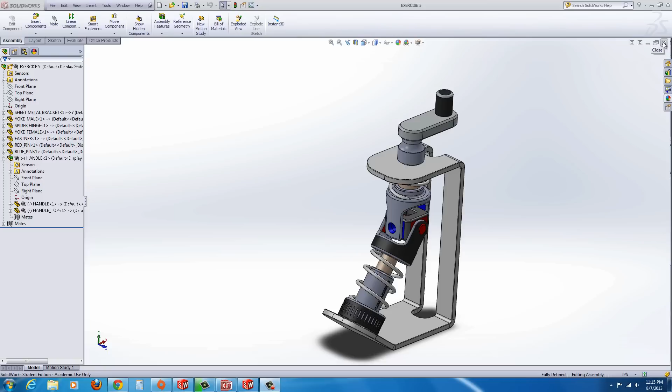So let's begin. I'm going to start with a new assembly file. Click on assembly, hit OK. And over on the left here, we get to begin the assembly. Just go to browse. And it should be directing you, or hopefully you're directing yourself, to the exercise 5 files.

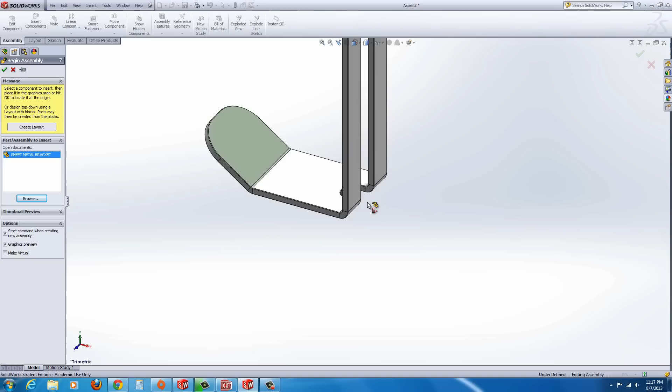Now, rather than just dropping it anywhere, sometimes you get lucky and your pointer lands on the origin, which is invisible right now on my screen. That's what we actually want to do with this particular part, is get it on the origin. If you can't see it, the easiest thing is just hit the green check mark, and it will automatically drop into the origin. This little F in parentheses that you see here, where it says sheet metal bracket, indicates that it's fixed. We do want the very first part in this case fixed. That means it will not move whatsoever.

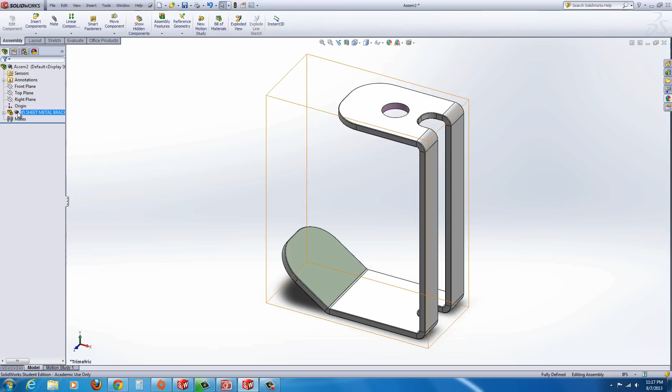What's going to happen with the additional parts once we start adding them? Those parts will spin around this part or inside them. And if you don't have anything fixed, all of them will just spin around arbitrarily. So by default, SolidWorks always fixes the very first part. If for some reason you want to change that, you can always right click on it. There's a float option. I don't want you to do that now. We actually want this to be fixed throughout this lesson, but just know that it's there.

Okay, let's begin. Under Insert Components here, if you hit the little arrow, you'll see that there's Insert Components, New Part, New Assembly, Copy with Mates. The New Part, New Assembly, that's what we call top-down assembly modeling. We could construct geometry using a skeleton of sketches or whatnot and generate the parts inside of the assembly based off of other parts and geometry. Therefore, they update together. Bottom-up is a much easier method for a new user. Actually, the top-down method is where all the power is at, but we cover that later in exercises 9, 10, and 11. But we're just going to start with bottom-up.

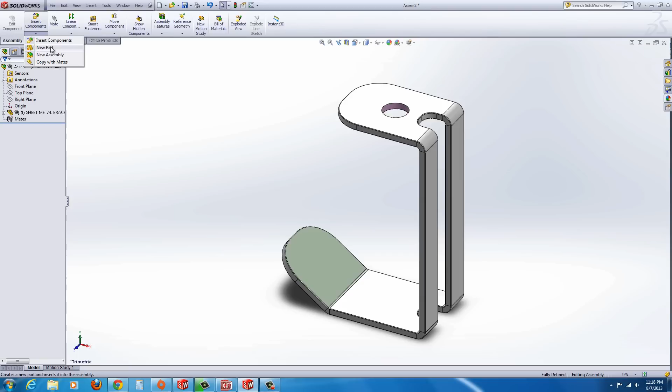So we're going to go to Insert Components, go to Browse, and we're going to locate the next part, which is the yoke male. Hit Open. Just click to drop your part somewhere around here. If you want, you could actually go to an isometric view. Like here, I've set to trimetric actually. You can go to isometric. Either one is fine.

Okay, we're going to begin by mating these parts. You could go to the paperclip tool here, and now you select that salmon colored surface there, the pink, and then the pink surface here. Be careful, SolidWorks will let you select edges. Edges are very useful for mates, but we're going to avoid using them in this exercise. Later on, they will be covered. But in this case, we just want to stick with faces.

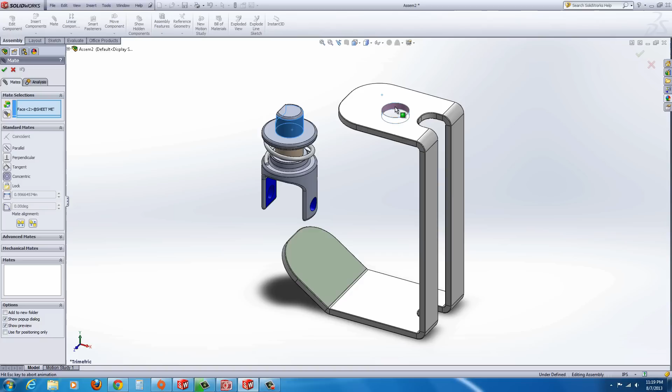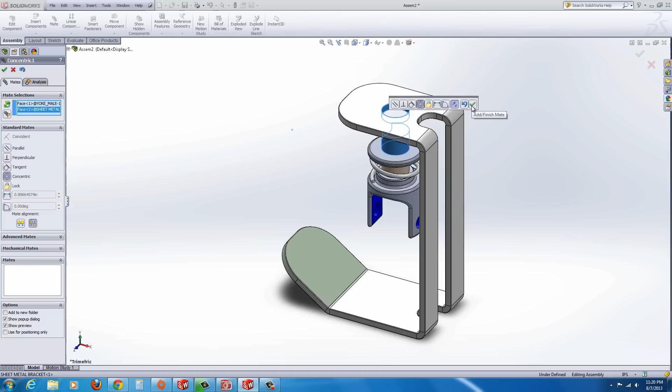And once those two are selected, you'll see the part moves into position, and it's actually aligned concentric. Now, this right here indicates that that little button is concentric. There's other options like tangent, perpendicular, parallel, at a distance, or lock. We don't want any of those except concentric. SolidWorks was smart enough to know that that's the most logical answer here. Let's hit the green check mark. In fact, let's hit the green check mark over here. Now what we can see, if we grab this part, we can actually move it.

You click on it, drag it. Essentially what we've done is we've removed some of the degrees of freedom. All it could do now is move up and down and rotate. It can no longer move in the X and Z directions.

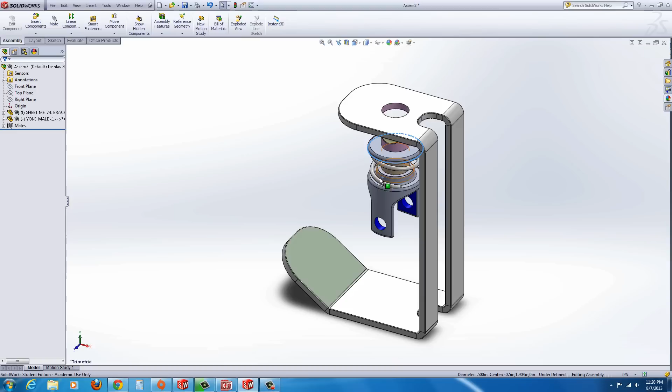So from there, let's just drag it down a little bit. And we're going to continue to add some additional mates. By the way, there is the Move Component tool. That's a nice tool. That should do exactly what we did earlier, where we just grabbed it and gripped it. But inside here, there's also free drag, along assembly, delta XYZ. We'll go through that in just a little bit. There's also collision detection, physical dynamics as well. But we'll cover that shortly.

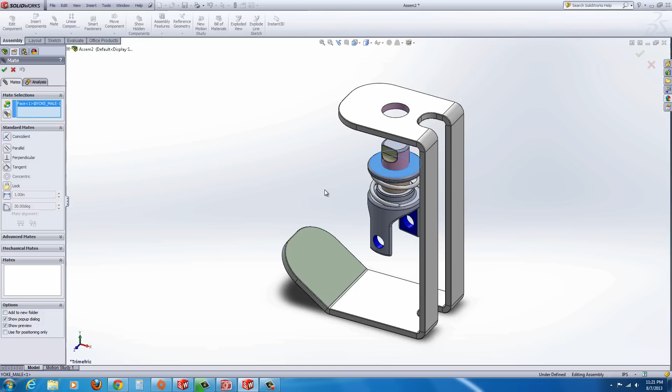But let's right now just go to Mate and see this light gray surface at the top here. Click on that. Now with your middle mouse button depressed or your scroll, you can push that down and move your pointer up. It should expose this underside surface of the flange. Click on that because we want our faces to go coincident. And again, SolidWorks makes the right choice for us, coincident being that choice. Go ahead and hit the green check mark to apply.

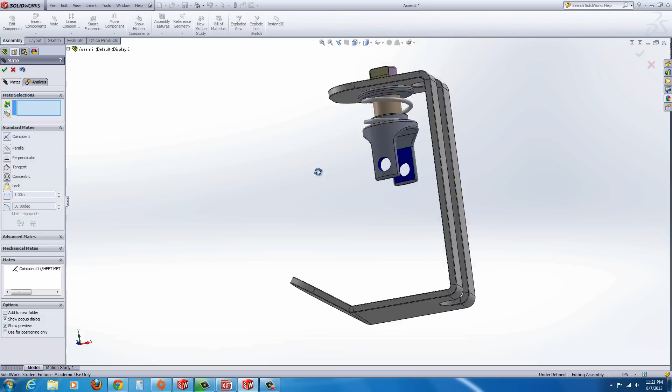Let's hit the green check mark over here in the upper left, and now we could go to Move Component and click on this top surface and drag it around. Now, we didn't have to go to Move Component, we could actually just click on it and drag it around, but just so you familiarize yourself with some of those tools as they're useful. You can see that it's removed the degrees of freedom for the vertical movement up and down.

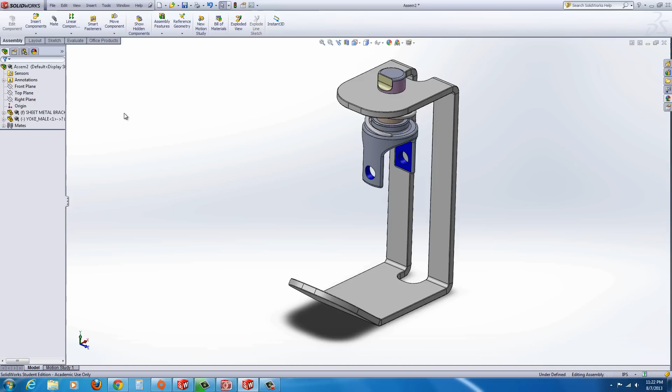Okay, let's introduce another part here. So we're going to Insert Components, Browse, and now we're going to look for the spider hinge. Click on that. Hit Open, and just somewhere around here, click to drop it. Okay, just some of the other techniques or technology that's built into here. If we go to the Move Component, I'd like to share with you some of these things. Right now we're on standard drag. There is rotate, and you can rotate around the center of the object, things like that, but we actually don't want rotate so much as we just want to show you collision detection.

Now with collision detection, you can have it test collisions between all components, which can be demanding if you have a lot of parts on the screen. So sometimes you might want to select the individual components by clicking these components and limit the amount of resources that the computer has to take up to try and calculate those things. We want it to stop at collision, and we'll leave the other, drag part only, alone. But now if we go over here, in fact, actually it's still set to rotate. Let me cancel that. Let's go back to Move Component, Collision Detection. Now drag it.

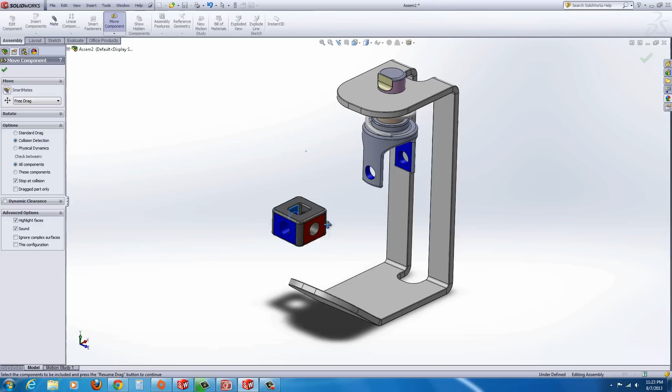And unfortunately, my computer seems to have locked up a little bit here. If we move it there, you can see it moves. Again, let's try collision detection. There we go. It's a little slow on the uptake. Right now I'm processing a video, so there's not a lot of resources on my computer. But anyhow, you can see as it hits, it actually pings, and you hear a little ping noise. As it strikes it, it shows where collisions are taking place.

There's also physical dynamics. Physical dynamics is a little bit different. It's kind of like the domino effect. You could actually push one part with another, or imagine like a pool table. You had a cue ball, and you grab the cue ball and drag it along the table, and whatever balls it hits, it moves them out of the way.

The only thing it doesn't accommodate for are several things, like the inertia or momentum and things like that. So when you push them, they just move out of the way, and that's it. They won't continue to move. There's no factors like gravity or things like that in there. There are packages for kinematics and dynamics where you can do that type of a study, especially in the SolidWorks simulation tools.

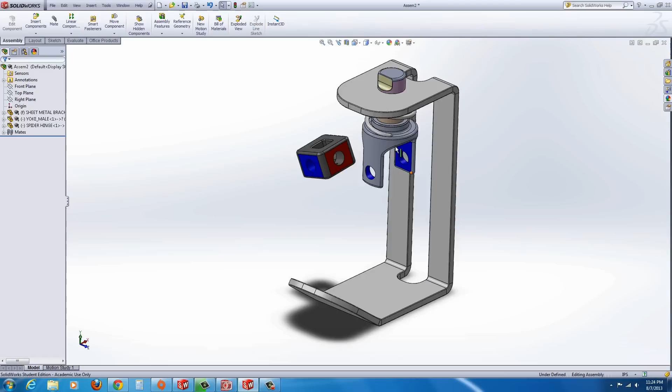Okay, let's move on and turn off physical dynamics. I moved it by accident there, just to show you. If you go to rotate component, you could rotate it around the centroid however you want. But let's get this locked in.

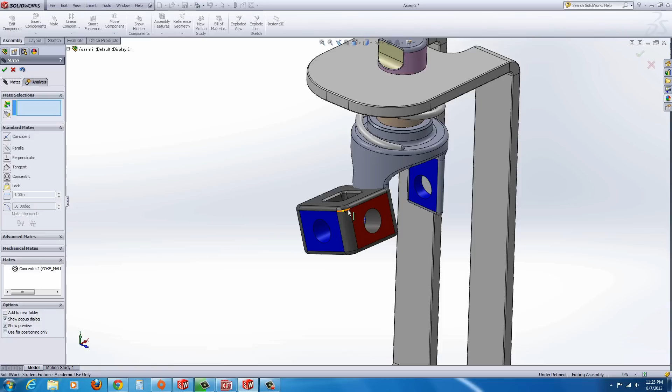We're going to go to the Mate tool, the little paperclip up here. Select this blue hole, the actual cylindrical face of the hole, not the flat, and then select the hole here, the blue hole. It should align itself, so hit the green check mark. Now your part might be over here or back here, but be aware it should be aligned concentric to that hole, and it always positions itself as such. It's almost like there's an imaginary rod sticking between them.

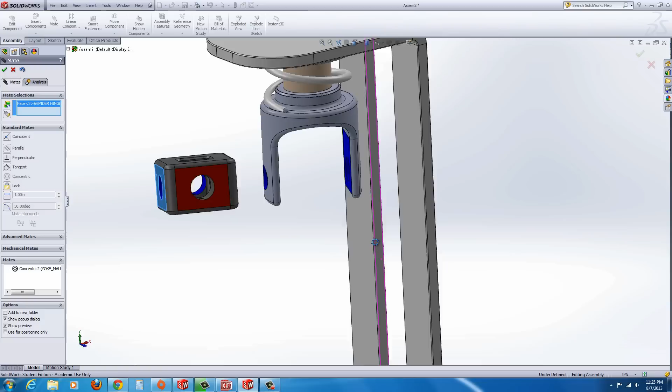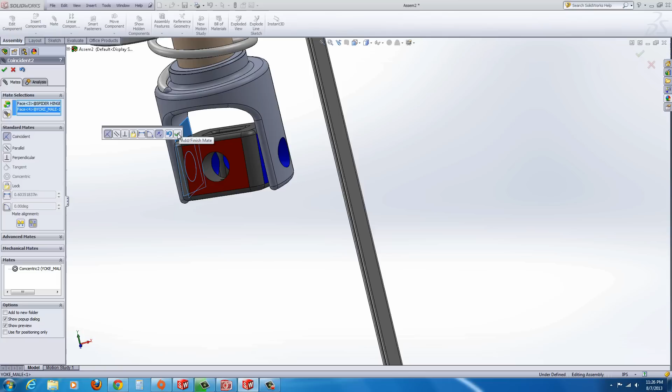Now let's go ahead and select the blue face of the pin, the flat blue face, and then select one of the blue faces on the inside of the yoke. The question is which one? You can select this one, but my recommendation is to select this one on this side so it goes in alignment with it. There's an aligned and anti-aligned option, or sometimes you can flip it, but you can run into little error messages from time to time if it's over constrained or something. So I just like to avoid it altogether. Just hit apply and make sure you get it right the first time. But if it's flipped the other way, try using that aligned versus anti-aligned option.

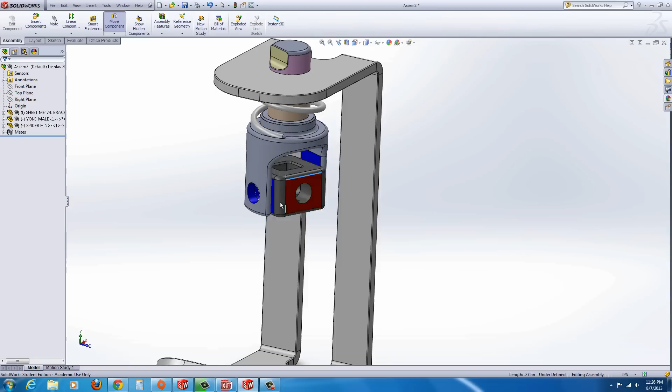Let's hit the green check mark, and you can see that we can now move and pivot this part inside there, and this rotates.

Let's bring in our next part. Go to Insert Component, and actually you do have the ability to use Explorer too. Microsoft Explorer, find the parts, and drag and drop them in. You don't always have to use this method.

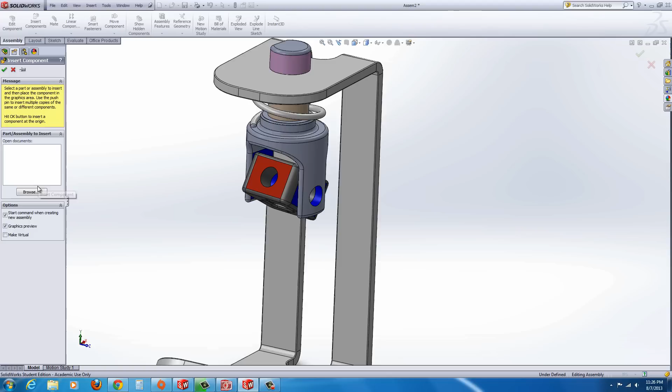Now I'm going to go find the yoke female, open that up, drag it in, and let's start establishing mates.

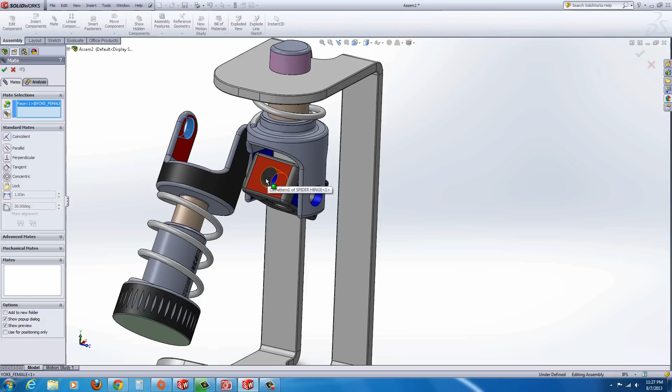Click on the paperclip here. Select the cylindrical hole, the red hole here on the leg of the yoke female, and then select one of the holes near the red face on the spider hinge to align that. Hit the green check mark. It should automatically go concentric.

Now select this red face on the spider and this red face on the inside of the actual yoke. Hit the green check mark to apply.

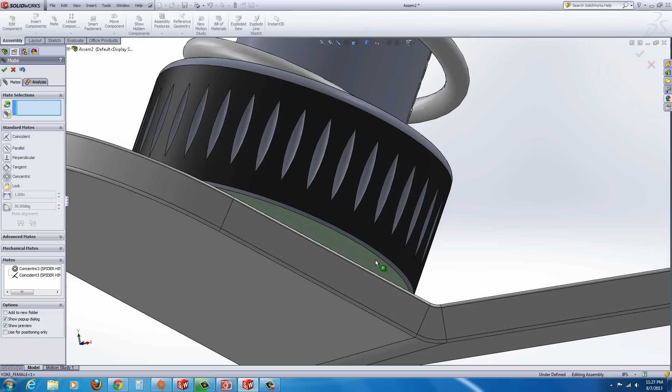Finally, select that little green underside surface there at the bottom of that plunger, and then rotate around until you select the pale green face on the bracket.

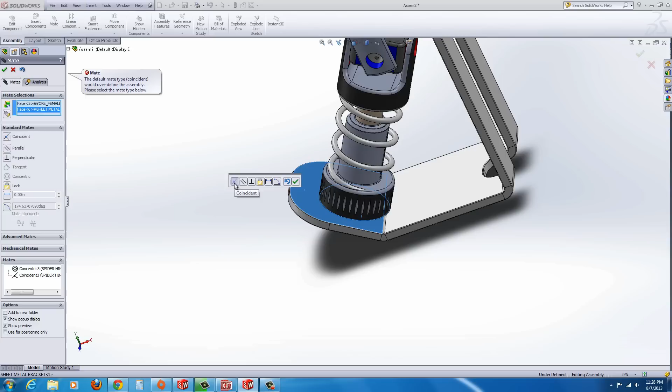Now you might get an overdefined mate type. The reason for this is that SolidWorks wasn't smart enough to select what we really needed. In fact, there's a little distance gap between those faces, so coincident wants to go face-to-face contact. It can't do that because there are other relations constraining up at the top. So this is where you could use parallel, and the parallel should align it.

There it is. Now, if for some reason it doesn't work and you keep adding mates, be very careful not to compound mates. In other words, if it's not working the first time, stop, delete it or undo it, then add your next mate. Over here in the feature tree, you'll see the two little paperclips of mates at the bottom.

If you hit the little plus symbol, you will see all the mates that have been added. If some of these are lit up in red or yellow, that's usually an indication that there's something wrong with them. You could right click on them and you have the ability to edit those features.

Here it will take you back. You could change it from parallel to perpendicular or coincident, whichever one you think you need to do if it is wrong. Sometimes it's easier to just delete it, or delete a whole series of them if you've compounded them by accident. You just click on it, hit the delete key on your keyboard, and they'll disappear.

Anyhow, that's one thing. You can also right click at the top of the assembly, and there's actually tree display, and you have the ability to show the mates that are dependent, view mates and dependencies. What that does is when you hit the little plus symbol next to each part, not only does it show some features here, but it also shows the mates that were established with that individual part.

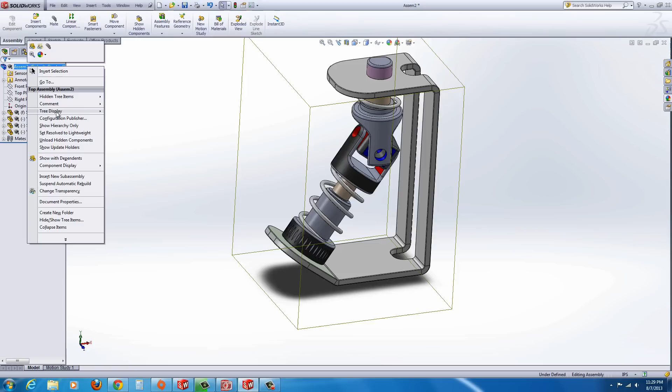I like that sometimes, but other times it's a little too much information. I sometimes just like it all categorized in the mates folder at the bottom. So let's go back to view features, and when we go back there you'll just see the features for each individual part.

It's whatever you prefer. Let's go ahead and go back to Insert Components, go to Browse, and find the red pin. Open that up, drag it over here, and we want that to go into the red hole.

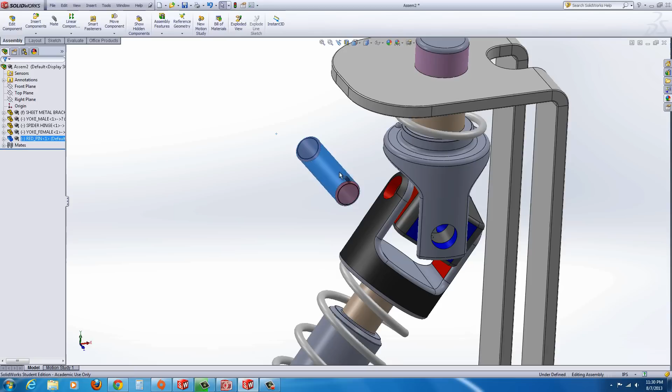So go to the Mate tool, or let me show you another trick. You could hold Alt on your keyboard, grab the surface you want to mate with your left mouse button, and drag it to the surface you want to mate it to, and it should go automatically in. In this case, you can see the little symbol of concentric next to the pointer. Release the mouse button first, then release the Alt key, verify it's concentric, and hit the green check.

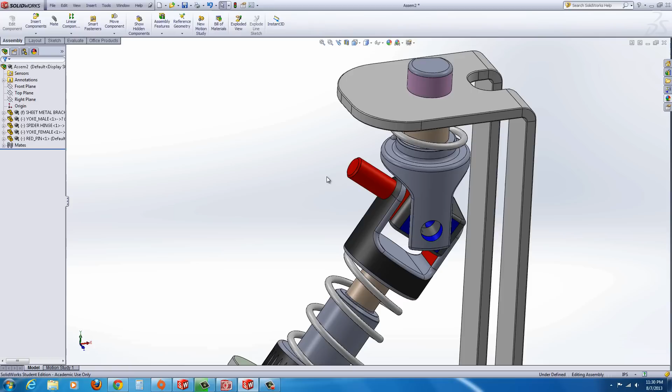This next one, the tangent mate, doesn't always work very well that way, so I just like to add it in manually with the Mate tool. Select this end face of the pin and this dark gray cylinder face, and it should go tangent by default. Hit the green check mark.

Let's go to Insert Components again, go to Browse, and find the blue pin. Now you're going to need two of these blue pins. Let's just drop one in over here first, and then I'll show you how to add a copy.

Hit Escape a couple times to make sure you don't have anything pre-selected. Hold Control and grab the blue pin with the left mouse button. Holding Control, you could drag off a copy. In fact, you could even mate this one if you wanted to, but I'm going to drag it over here on the far left side and release it. Now I have two pins.

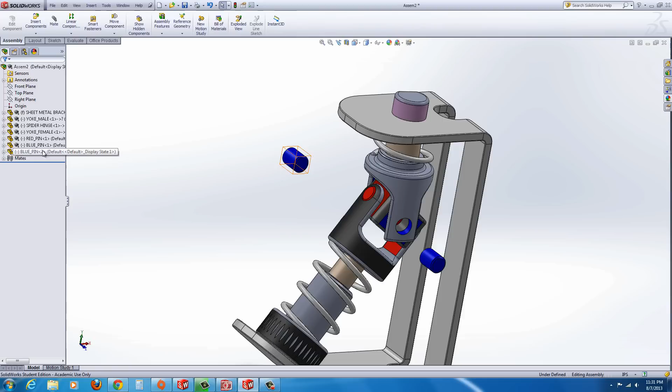So that's one way. You can also grab them from the feature tree and, holding Control, drag them in as well. But let's go ahead and mate these.

Go to the paper clip tool. Select the cylindrical face of the blue pin and the blue hole. Green check mark. Select the end face of the pin and push it in by selecting the gray face on the yoke it's mating to.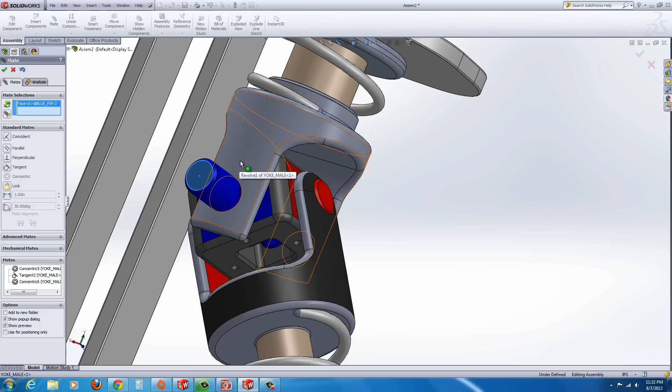Let's do that on this side now. Select the cylindrical face of the pin, select the hole, hit the green check mark. Select the end face of the pin, then select the cylindrical gray face on the yoke. If it needs to be flipped, you do have a flip mate alignment option, so you can flip it around if it's on the wrong side. Hit the green check mark, and the green check mark again.

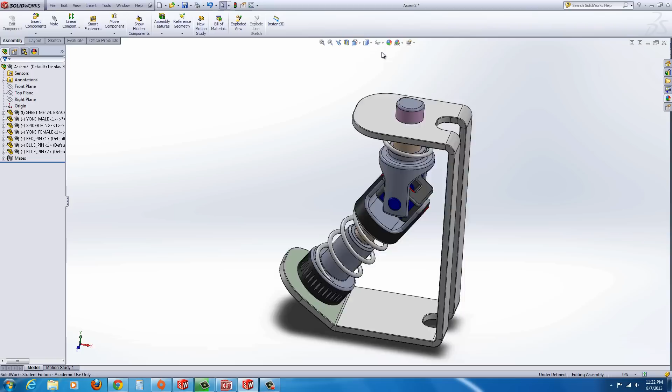Now there's some additional parts we need to add. If we rotate this around, let's test it out first. Click over here, go to trimetric, and you can see. If you grab any part of this, the top here, you can drag it with the left mouse button, making small ellipses with your pointer, and you can see it rotate dynamically.

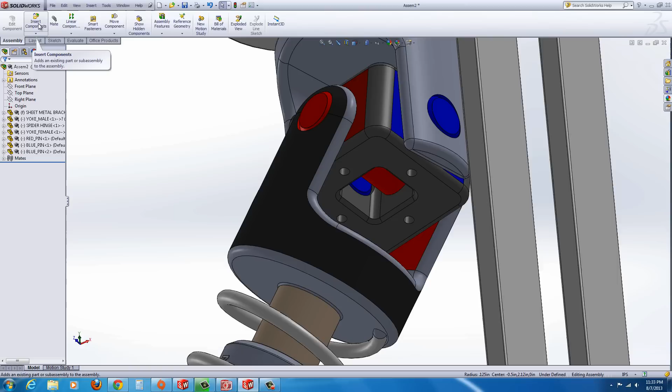What I'm going to do is rotate it so I can flip it around. Now under here there are some set screws that we have to add, so I'm just going to add one and you can add the rest for practice. I'm going to go to Insert Component, Browse, find the fastener, and hit Open.

Your fastener may not show the thread that's on there. The thread is purely cosmetic. I think the ones I uploaded to the web page do not have the cosmetic thread on there, so don't worry, it just has a picture on it, that's what it is.

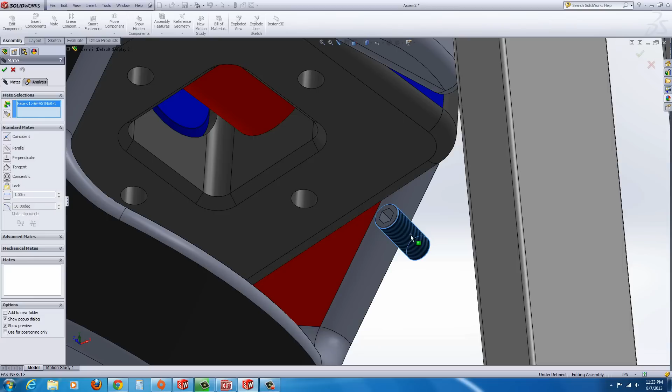Let's go to Mate. Select the cylindrical face of the fastener where the thread is showing up, then select the hole you want to drop it into. Make sure it's flipped the proper direction so you can see the opening there. Hit the green check mark. Now select the end face to this flat face to lock it in.

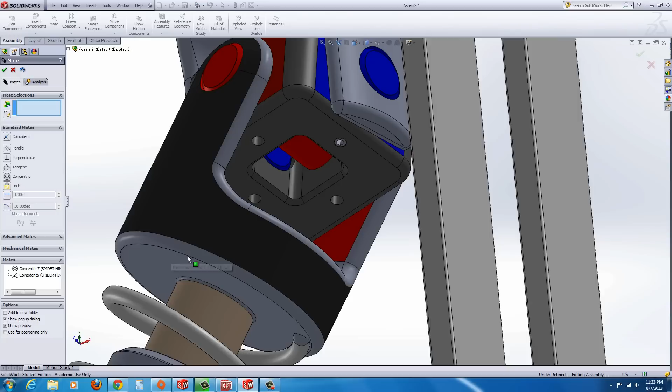Like I said, I'm just going to do one, but you could try the other three. It's good practice for you.

Alright, and finally we're going to introduce a sub-assembly. Sub-assemblies, when you go to Insert Components, use the same method. You go to Browse. The difference is when we look here, you'll see the sub-assembly, which is actually called Handle Top.

That's not the right one, I'm sorry. It's not showing up. Why would it not show up? Take a look down here. Some of you might have this set up differently, but if you're not finding a part or assembly you're looking for, make sure this is set to what you're looking for. I just prefer to go with all files because that way I can see them all.

Sometimes though it's a cluster of choices, so you might want to limit it to assemblies only. In this case we can see the sub-assembly, but I'm going to go with all files. Now we're looking for the handle. Click on the handle, hit Open.

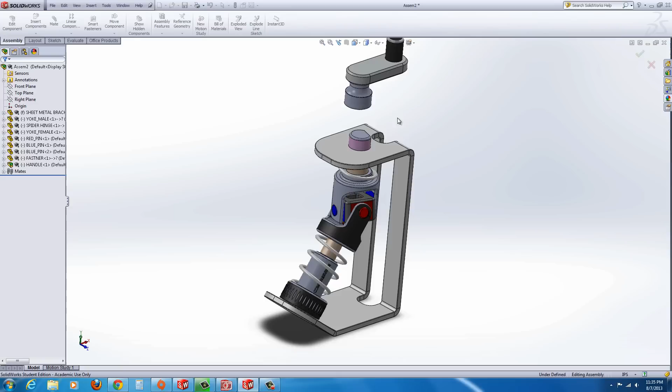Taking a bit of time here. Let's just drag it up there, up above. You could always move it up there if you want.

Let's go to the Mate tool and select the cylindrical face. SolidWorks doesn't look at the different diameters with cylindrical faces, it doesn't matter if it's smaller or larger. They're going to basically go by the center line of each. So click on both of those to align it.

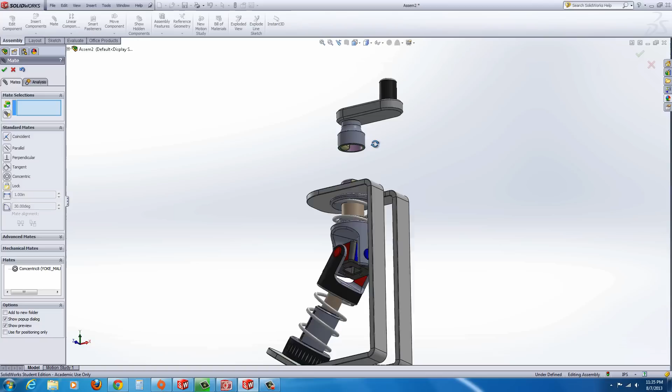Now these yellow surfaces here need to be aligned. This little flat yellow surface here needs to be aligned to this. Click on that, and hopefully it should align itself properly. If not, remember you have the ability to flip the Mate alignment. Hit the green check mark. And now there's a little green underside surface here. Select that face.

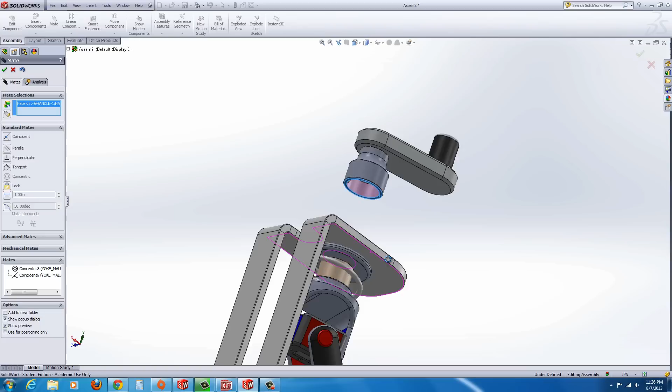And then we want that to be mated to the top surface, but we don't want it to touch the top surface. We actually want a little bit of a distance gap. So when you select it, it automatically goes to coincident, which is not what we want. But if you go over here to the left, or even if you go over here to distance, either one is fine. Click on distance, and watch this.

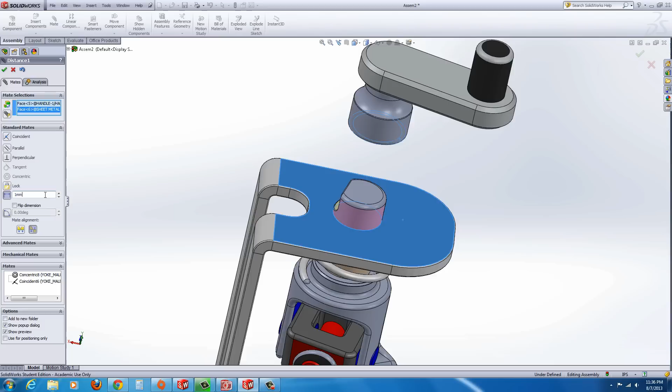Notice it's in inches on mine. But let's say you knew what it was in metric, but not inches. So like we want it to be 1 millimeter. Now 1 millimeter is equivalent to 0.0393 inches. But if we don't know that, we could type in 1 and lowercase mm for millimeters. Hit enter, and it will automatically update to 0.0393. And there's a little bit of an offset.

In fact, we could go to 0.5 mm to get it in there a little tighter. You can see the distance gap between the two. And that's how you could apply a distance between them.

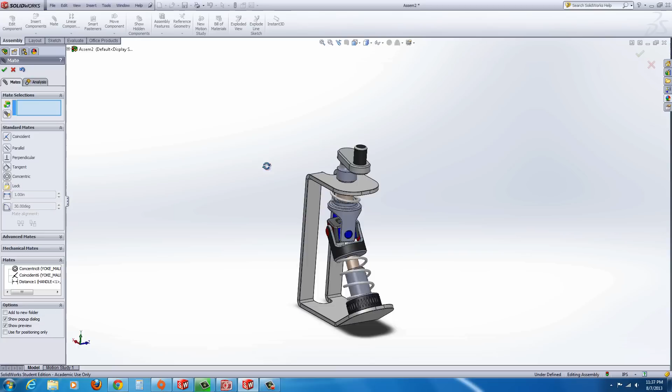And now the test. Let's rotate this around a little bit and see if it all moves together. Hit the green check mark on Mate to get rid of it. You're done with Mates. Let's save this too.

Let's go to File, Save, or Save As. Either one's fine. And I'm going to save to my desktop, and I'm going to call this the E5 assembly. Hit Save.

Alright, grab this little handle and try and drag it in these little elliptical manner. And you can see if it rotates dynamically. If it all rotates together and nothing is flying out the sides or locked up, you've done it correctly.

Also just be aware with your part files, if you're doing the top-down method, if you want to keep the part files together, there is an option. There's a couple options for saving everything a certain way. I could go to Save As. Let's say rebuild here. Let's say I wanted to save this in a separate folder, and I wanted to take all the parts with it.

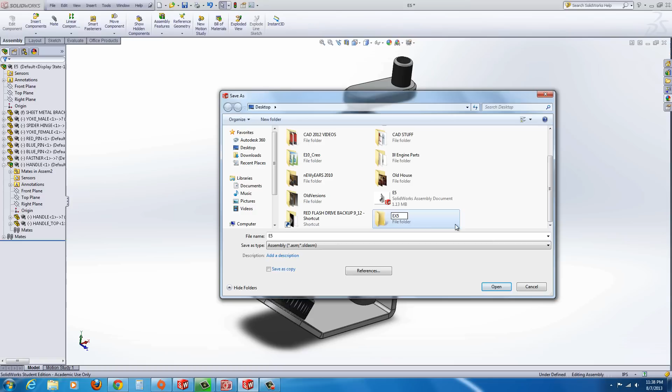This is kind of neat. I could just write out here, right click, new folder. So I'm on my desktop. I'm going to call this the EX5 for exercise 5. I'm going to double click on that folder.

Now, if I were just to hit save right now, it would just save the assembly file. But those part files are needed for the assembly to exist properly. And sometimes if you are transferring files from one computer to another, if you don't bring these over or send them to someone, all those other part files, then they might not be able to open the assembly. They could see a preview of it, but they can't actually open the whole thing and make a drawing of it.

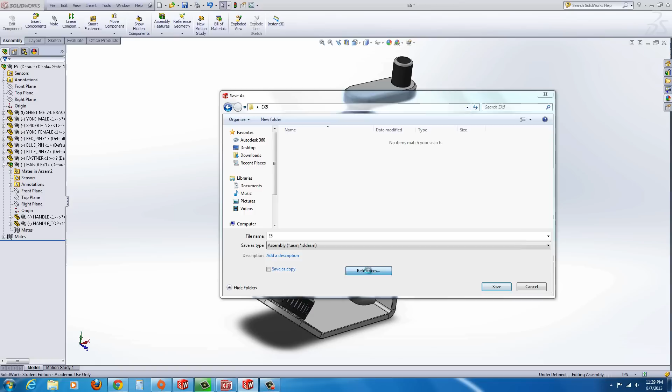So here's a little way you can do that. There's a references button down below. Click on references, and you'll see the paths where all these are located. Just go to browse. Now, you want to find that EX5 folder we just created. You click on it, hit OK. That means that it's going to send all the copies of all these parts and sub-assemblies to that folder for us. And then you just hit Save All.

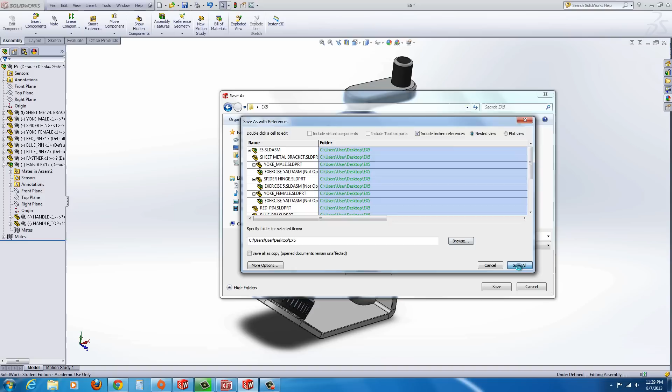And now it's made copies of all of it. That could be a good thing, and that could also be a bad thing, because if someone makes a change to the part where it was originally located, it will not update on here. But you can have the ability to reload and replace those parts, so it's not critical, but we'll cover that at a later date. And that concludes exercise 5.